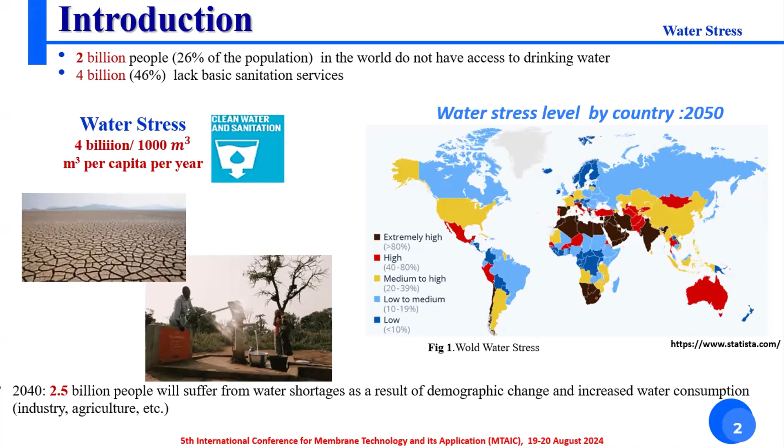By 2030, we must substantially increase water use efficiency across all sectors and ensure sustainable supply of fresh water to address water shortage.

Desalination helps mitigate the impact of climate change, such as reduced rainfall and drought, which exacerbate water scarcity. It is a strategic and necessary response to the challenges posed by water scarcity in Algeria, and it allows the country to secure drinking water for its population and support the growth of its agricultural and industrial sectors.

In Algeria, the projection of desalination plant capacity amounts to 2.3 million cubic meters per day.

Operating costs are mainly affected by the power or energy station, but the significant decreases in cost make desalination increasingly competitive. The following figures show that desalination capacity demonstrates Algeria's commitment to using desalination technology to address its water scarcity challenges.

The total capacity from both seawater and brackish water desalination plants helps ensure a stable and reliable supply across the country.

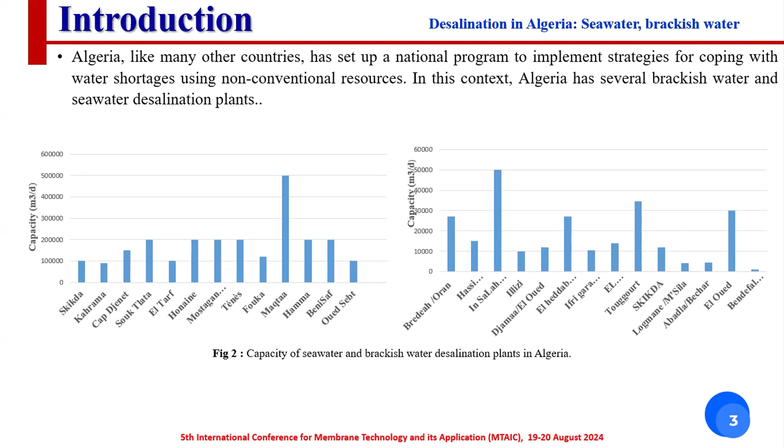Among the different desalination technologies, there are two main processes: one based on evaporation, and the other based on membrane. The evaporation process can operate by heat supply, as in MSF multi-stage flash and multi-effect desalination, or through the supply of electric energy via mechanical compression, vapor compression.

Regarding membrane technologies like reverse osmosis, nanofiltration, or electrodialysis, they all operate by supplying electrical energy. Reverse osmosis involves forcing brackish water or seawater through a semi-permeable membrane that blocks salt and other impurities while allowing fresh water to pass through.

For operation, high pressure is applied to feed water, pushing it through the membrane. The fresh water is collected on the other side, and the concentrated brine is discarded.

For reverse osmosis, the system has lower energy consumption compared to the evaporation process, and can be scaled to various sizes, but membrane fouling and scaling require regular maintenance, and high quality membranes are very necessary.

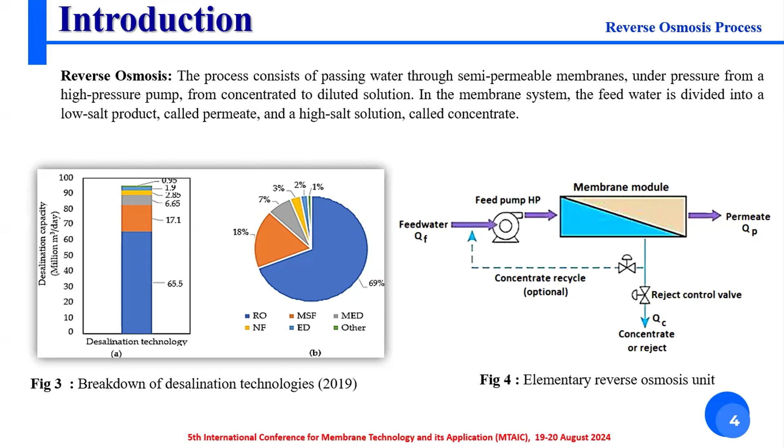The main objective of our work is the design, sizing, and optimization of a RO-PV desalination plant to meet the water needs for the Djamaa El Oued site, using IMSDesign software to determine the appropriate membrane and optimum configuration in compliance with the standards. The optimization procedure is based on the selection of the minimum number of membranes and stages for a given feed rate.

For working conditions, we have production rate, flow rate of 1 cubic meter per hour, and quality of feed water from the El Oued region. The plant operating mode is 4 hours per day with energy storage, operating temperature of 25 degrees Celsius, and operating pressure varying between 5 and 14 bars.

For modeling and sizing the renewable electricity generator or solar PV, we have used the PVsyst software.

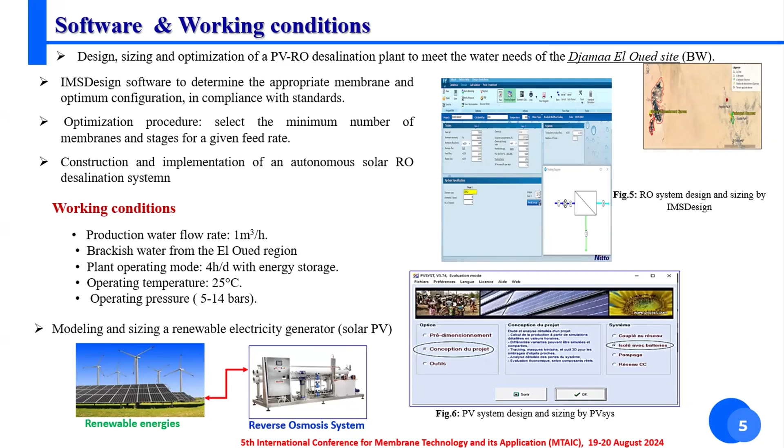A reverse osmosis water treatment system consists in general of the pre-treatment, the membrane elements, and the post-treatment section. In the context of desalination, particularly reverse osmosis, pre-treatment is a crucial step to ensure the efficiency and longevity of the membrane. Proper pre-treatment helps prevent fouling, scaling, or other issues that stop desalination processes, and can be divided into two main categories: water chemistry and physical pre-treatment techniques.

Post-treatment is used to achieve the required product quality.

Reverse osmosis system performance is typically characterized by two parameters: permeate flow, or product, and permeate quality. These parameters should always be referenced to a given feed water analysis, feed pressure, and recovery.

We show here some configuration systems that we studied in our work.

In our study, we have used the Integrated Membrane Solution design software for designing and optimizing membrane-based water treatment systems. It allows us to simulate and predict the performance of different membrane configurations and operational conditions.

Salt water is considered the only natural water resource in the study area.

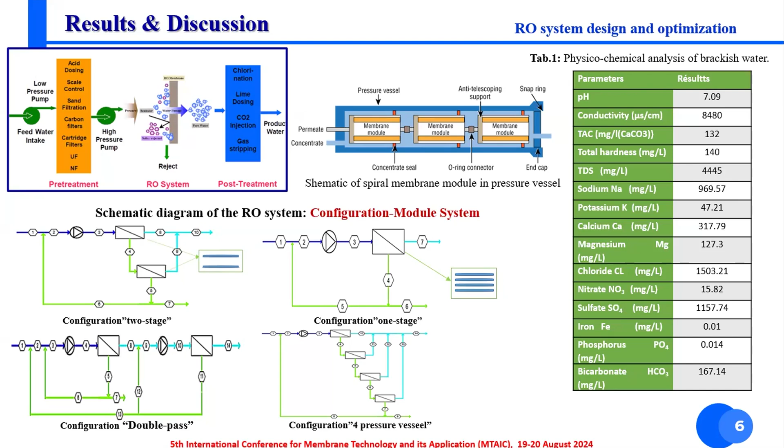In our work, different membrane types are tested and analyzed, namely ESPA2-LD4040, ESPA4, CPA5, and LFC3 reverse osmosis membrane. Various reverse osmosis system configurations are tested as presented in the table. For example, scenario 2, we have two stages and one pressure vessel per stage, with two membrane elements per stage.

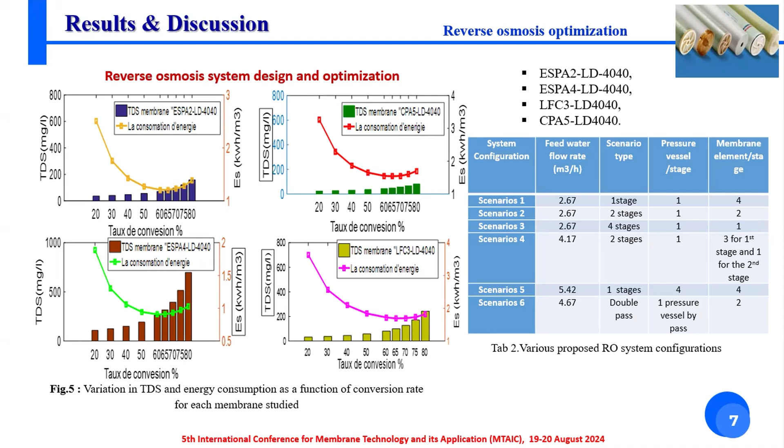We have examined the effect of operating conditions on membrane performance: recovery ratio, energy consumption, temperature, and TDS. The results of the modeling parameters measured in the region are shown in the following figures, which illustrate the variation in TDS and energy consumption as a function of conversion rate for each membrane studied.

This figure shows and summarizes the simulation results obtained: conversion rate, specific energy consumption, and total dissolved solids content for each membrane used independently. We note that specific energy consumption varies between 0.9 and 3.6 kilowatt-hours per cubic meter for the four types of reverse osmosis membrane, for conversion ratios between 20% and 60%.

We also note that from a conversion ratio of 60%, energy consumption stabilizes, enabling us to choose the right membrane based on this ratio.

We found that the ESPA2 LD4040 membrane has the lowest TDS value, around 70 milligrams per liter, and an average energy consumption of 1.2 kilowatt-hours per cubic meter compared to the other membranes. We therefore choose the ESPA2 membrane for reverse osmosis, with its good water quality, for the rest of our study.

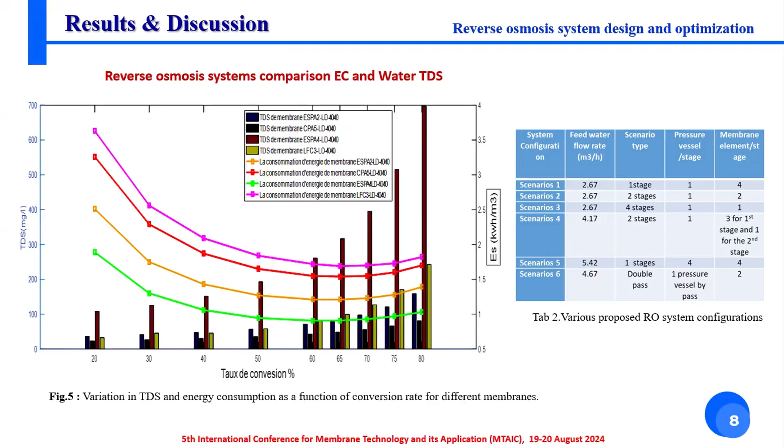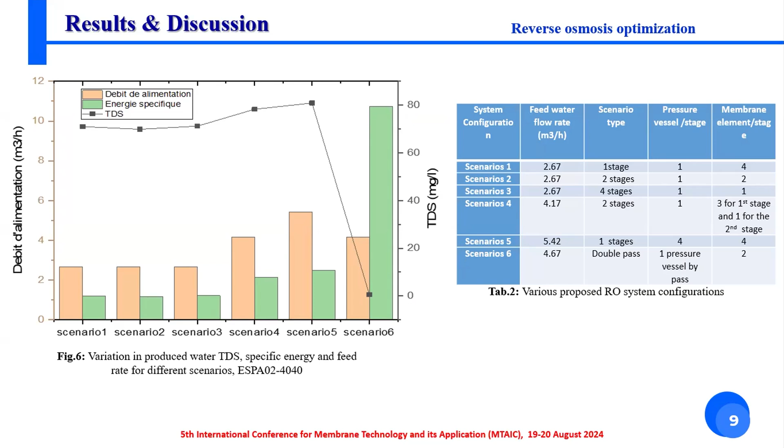The results demonstrate that configurations 1, 2, and 3 using the ESPA2 membrane consume the least energy. For technical reasons and the availability of materials, we have chosen configuration 3, consisting of 4 stages with a pressure tube. Each stage comprises membrane elements connected in series.

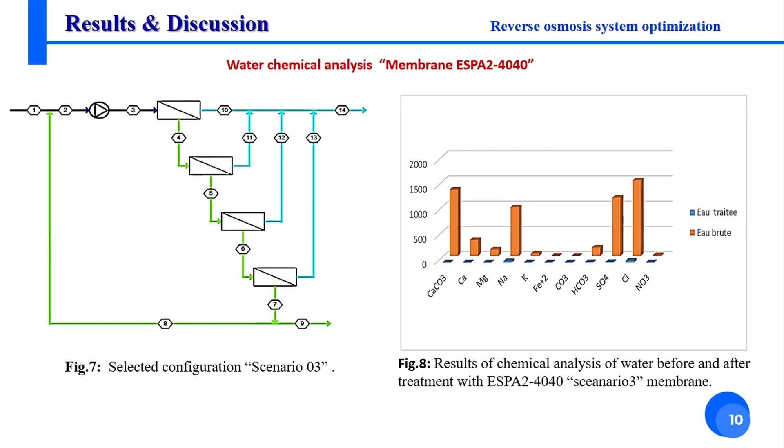Results of chemical analysis after treatment with ESPA2 are presented in this figure. The comparison clearly demonstrates the effectiveness of the reverse osmosis filtration system in reducing the concentration of various undesirable chemical components in brackish water, achieving a reduction of over 95% for most parameters. The system ensures that the treated water meets high standards of purity and safety, making it suitable for drinking water, agriculture, or other applications. For example, we have hardness rejection and sodium and potassium rejection.

In this slide, we show the numerical results obtained using configuration 3, representing the energy consumption and TDS for different feed water temperature values using the ESPA2 membrane. The curve shows a progressive increase in TDS with increasing temperature. It can be seen that when temperature rises from 10 to 45 degrees, the TDS increases from 44 milligrams per liter to 127 milligrams.

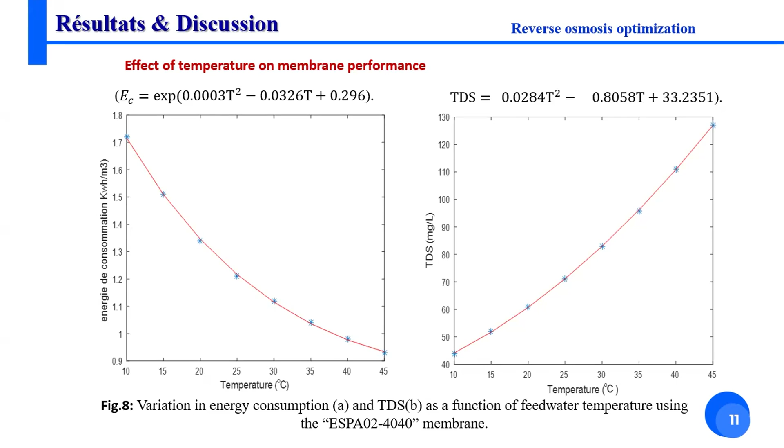Analysis of the graph clearly shows that increasing the temperature leads to an exponential decrease in energy consumption in the reverse osmosis system. Temperature plays a critical role in the performance and maintenance of the reverse osmosis system, as temperature can influence the solubility of salt and the permeability of the membrane. High temperature can also have negative effects, such as the formation of deposits or fouling, and the promotion or development of biological growth.

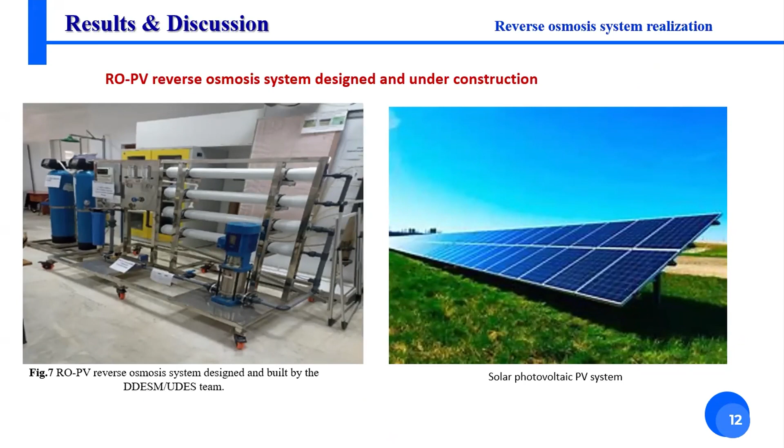Here we present the reverse osmosis system that has been designed and is currently under construction. It will be coupled to a photovoltaic solar generator with an energy storage system. Integrating a desalination plant with a solar energy system is a sustainable approach that meets both water and energy needs.

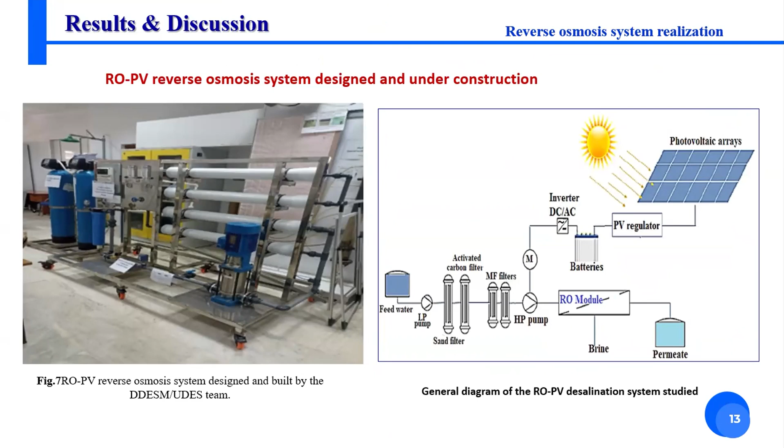Dr. Zahia, could you hear me? The integration of energy... Dr. Zahia, could you hear me? Yes, we are now 15 minutes in and we have a very tight schedule. Could you please move to the conclusion?

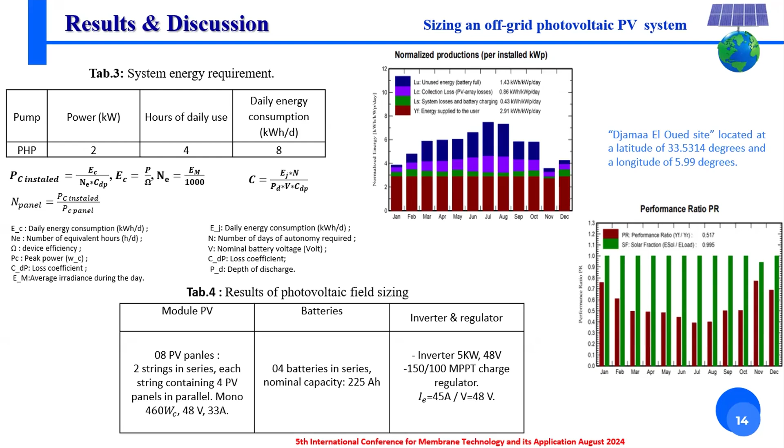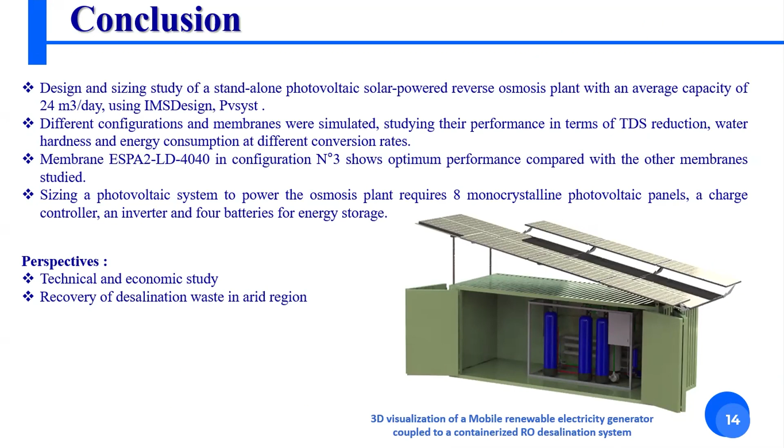As a conclusion, integrating water desalination with renewable energies offers a promising solution for meeting drinking water needs in arid and remote regions. The study highlighted the importance of modeling and optimizing system components such as the reverse osmosis plant and the PV system. The use of specialized software for sizing and optimization has allowed us to obtain accurate results and design the optimum desalination system. Thank you.